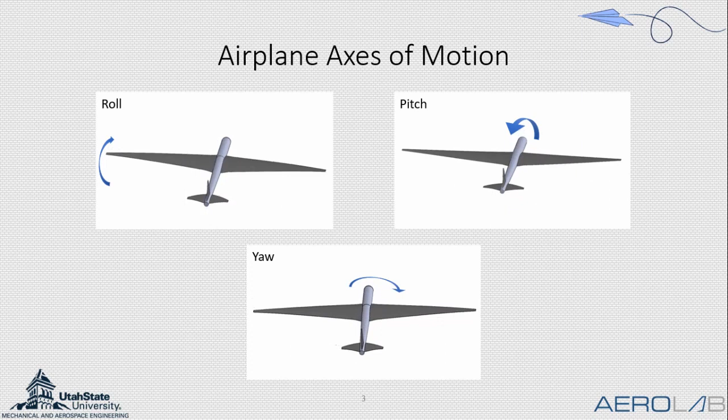So in order to do this, first we need to talk about the differences between traditional flaps and parabolic flaps. Traditional flaps are what you generally see on most small scale aircraft. They just have a single hinge point, single rotation, and it just rotates about that point. A parabolic flap, on the other hand, has a hinge point, but it curves to form a parabolic profile, a conforming camber line. So it's making sure it's the most efficient after that hinge point.

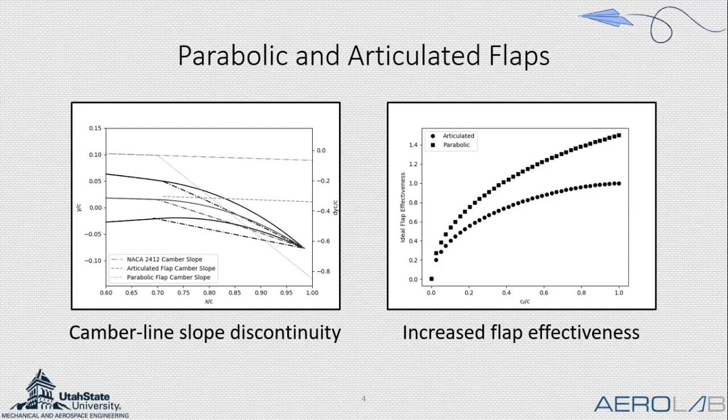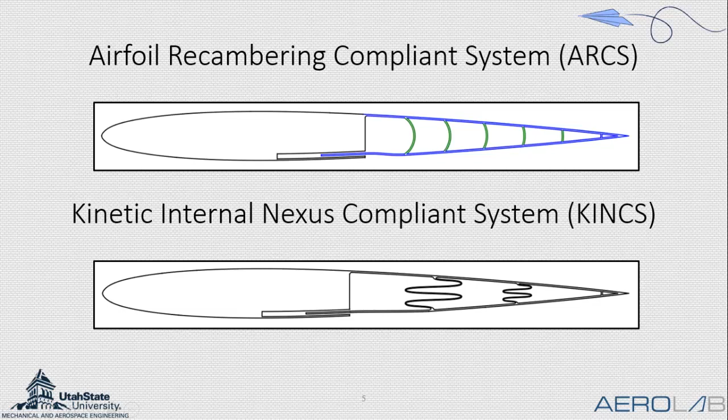And so here we present two designs, the ARCS design and the KINCS design. The top being used with one type of control surface, the bottom, the KINCS design, being used with another type of control surface. What you can see here is they have these flexible arcs, these not so flexible kinks, that when you pull on the tongue, it deflects the wing down. And so, like I said, with each one you have a control surface type.

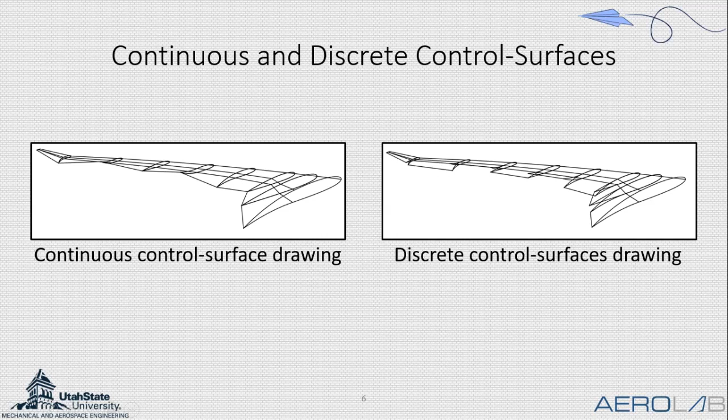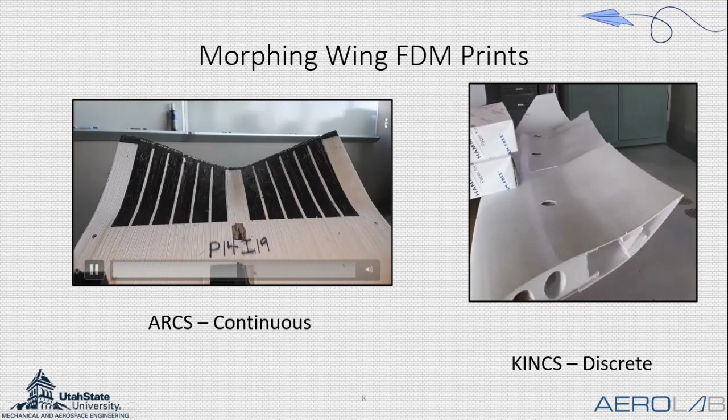Shown here is the ARCS mechanism on a continuous control surface wing design. And on the right is the KINCS mechanism on a discrete control surfaces design. And so you can kind of see that continuous trailing edge right there. And over here, the discrete disconnected trailing edge. And so, like I said, we ended up choosing the discrete flaps because they were better able to control yaw than the continuous control surface.

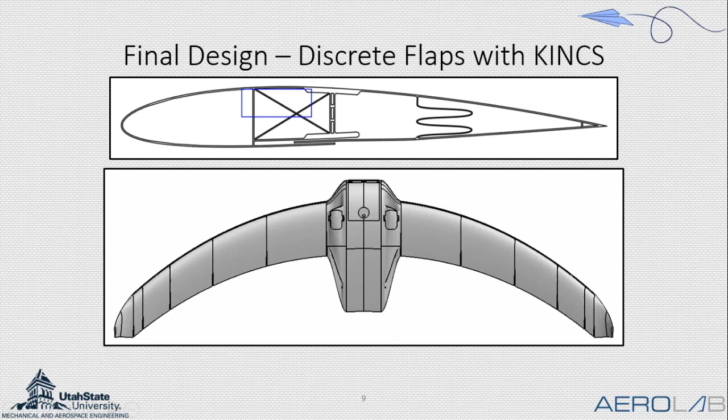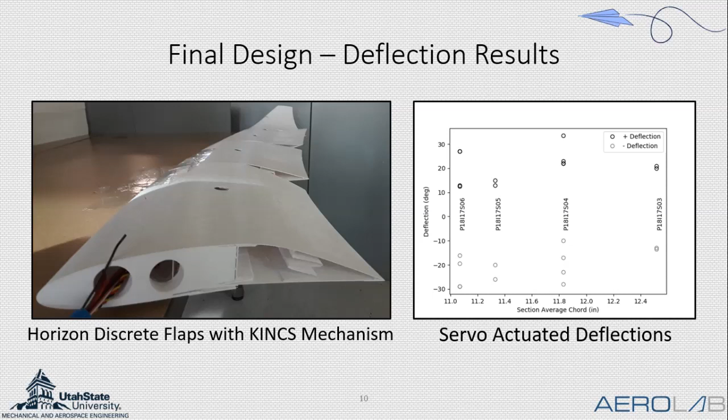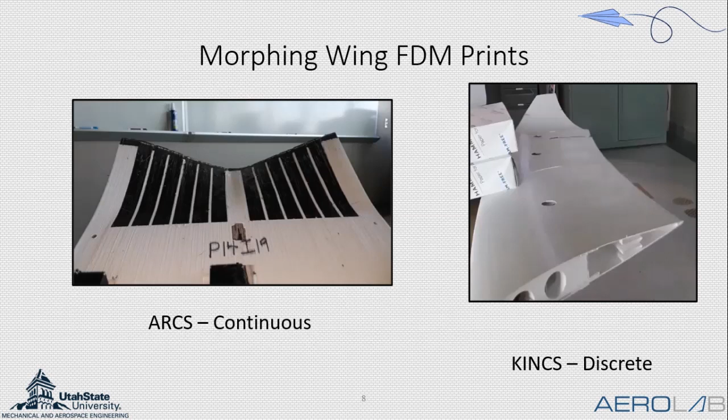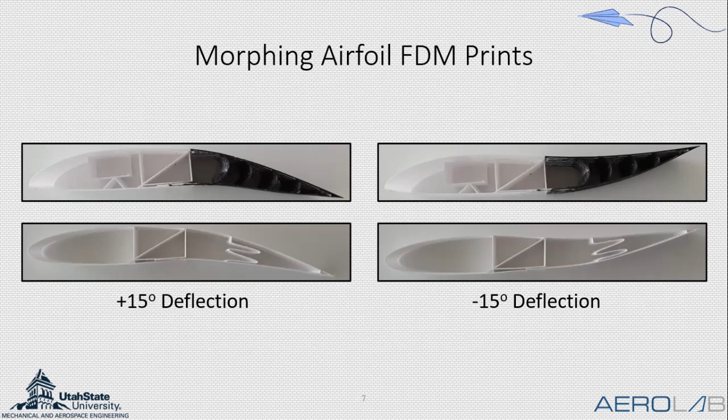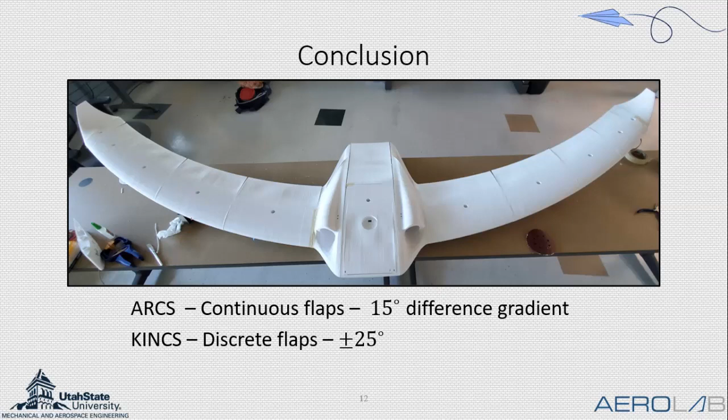So in conclusion, we present the ARCS design with continuous control surfaces and the KINCS design with discrete control surfaces as potential solutions for controlling yaw. And we present the KINCS design with discrete flaps as the design that will control yaw better. And shown here in the picture is the Horizon airframe, once again with the cosine clustered discrete control surfaces using the KINCS mechanism.